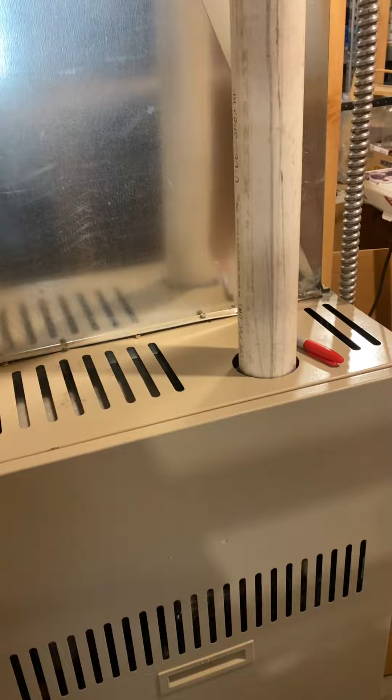Okay, so what we're doing is in the cabin basement, they have this furnace. So we're going to replace the furnace with a new furnace. Our new furnace is going to be 110,000 BTU.

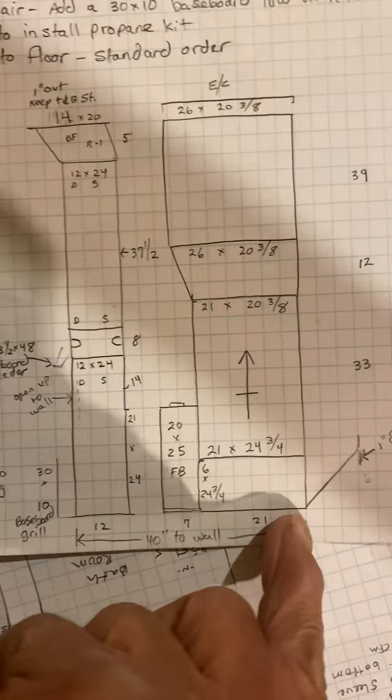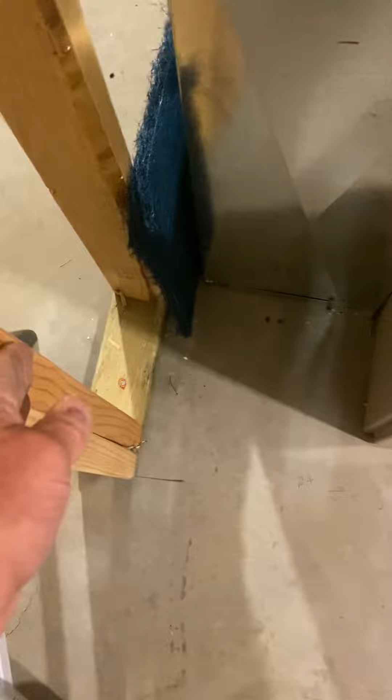I wrote on here, the right side of the furnace is going to be 40 inches from this 2x4 wall, all the way over to here. So you're going to have a 12-inch return air duct, 7-inch filter in your furnace.

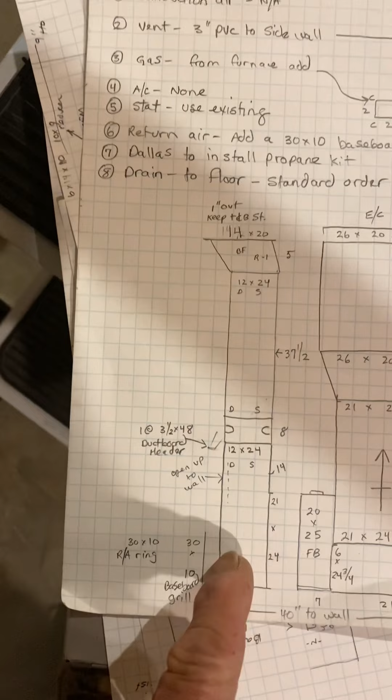Okay, so on the return, it's going to be tied against the wall. And duct just as it shows. I have a cut line right there.

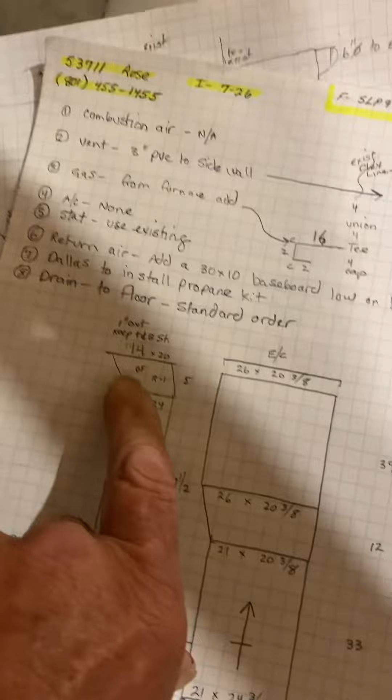So this is going to be a transition, so just do what you need to with this stud here. But it's going to transition from here to 24 by 12. Starting collar there.

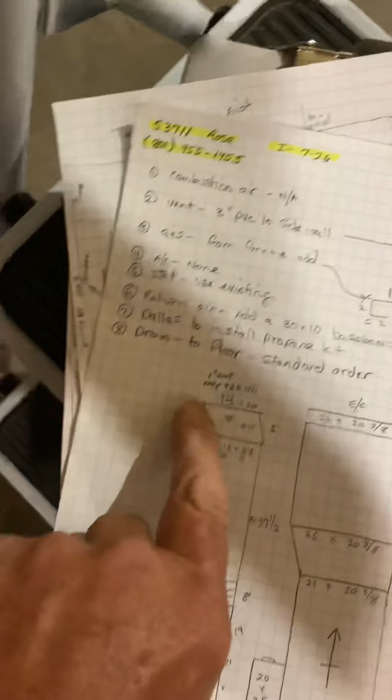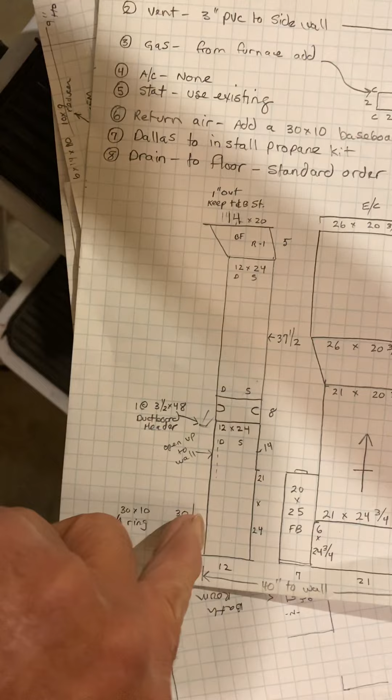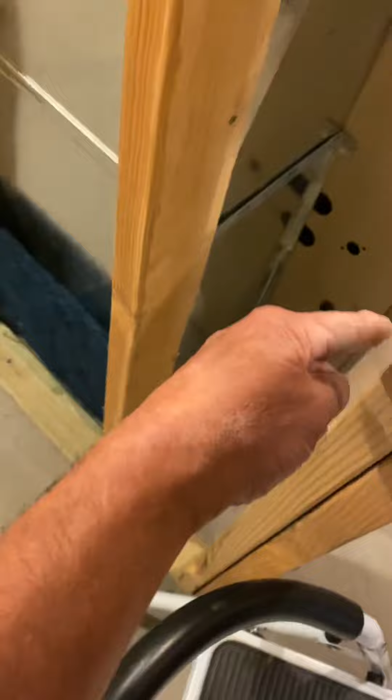Anyway, but we're going to add a 30 by 10 baseboard grill in the return. And so you need to cut out here and put a ductboard header, and I'll give you a piece of panning for the inside of this.

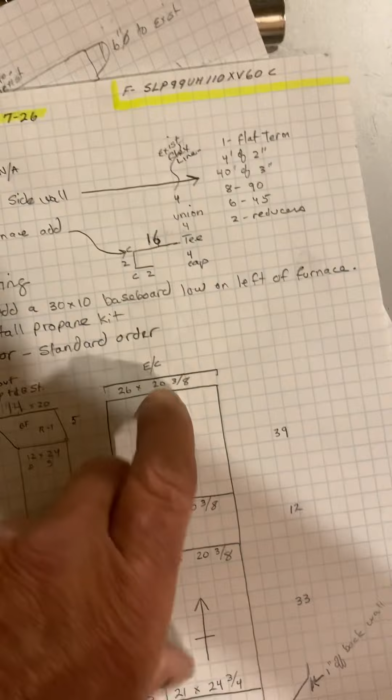Okay, then this duct is going to sit on a base furnace, an increaser, and a piece of duct should be an inch from the ceiling.

Okay, in the side view on the duct plan. So before I go over that, all this duct is undersized. So we're ripping down all the square ductwork in the house. So all these heat runs, round heat runs that are existing, we are going to hook back onto them.

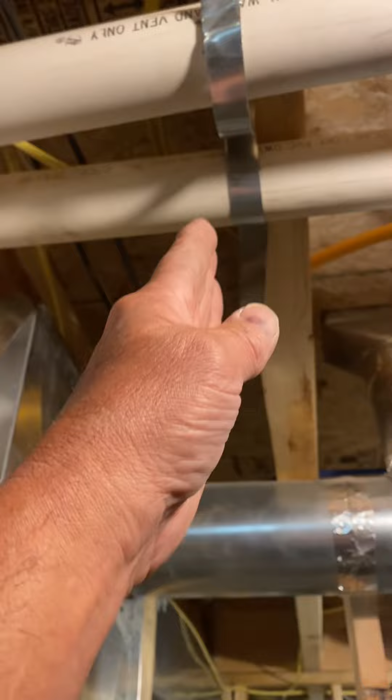Okay, so our side view, got a takeoff off the back. And then this is a top view, just duct as it shows. So duct will be like over here, straight.

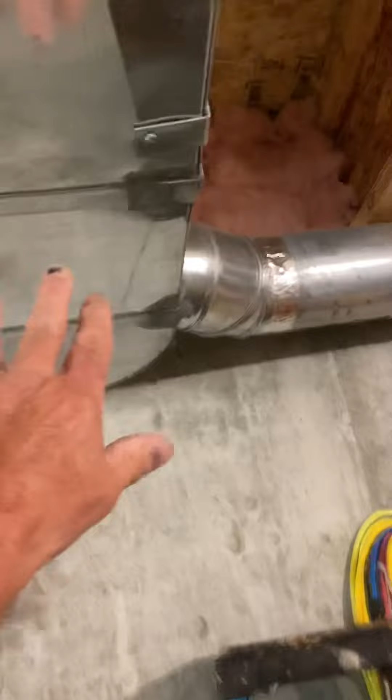As it shows, it's going to come down here, and then I have a T, 24 by 8 to a 20 by 8 and a 6 by 8, or 8 by 8 with a square to round 6-inch round.

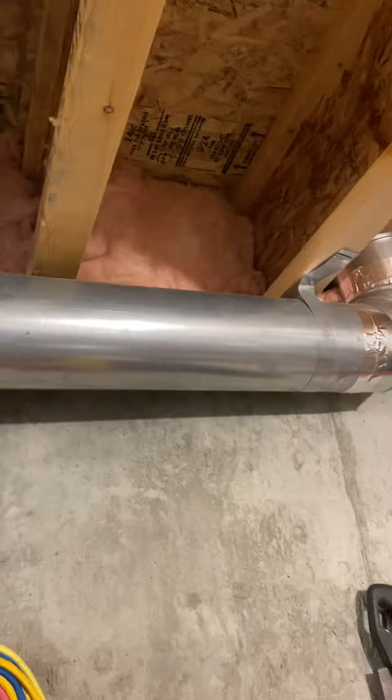And you'll just tie back in that. By the way, this run here and this run up here, you cannot get to. So be careful when you disconnect them that you don't break them or let them fall back, because they're inaccessible.

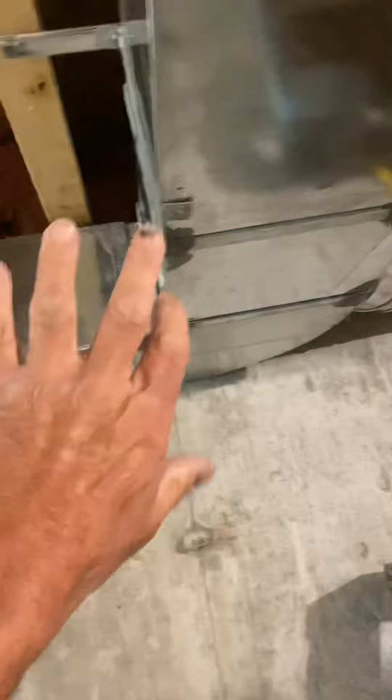Okay, but anyway, so reattach this. This side will just be straight duct. Reattach this one.

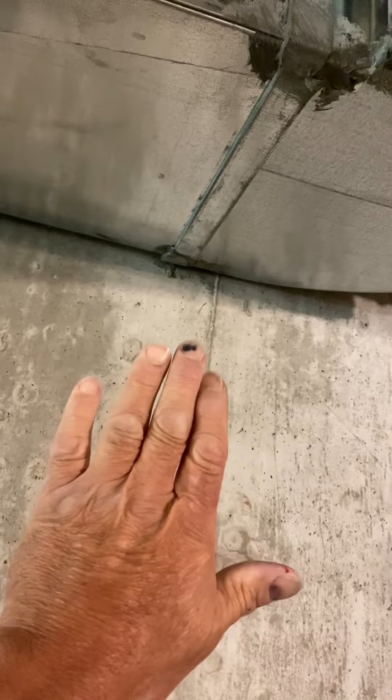Need to reattach this, but our duct, I didn't tell you this, our duct on this wall is going to be about 8 inches out from the wall, so he can get insulation and stuff back in there. If it's 9 inches, that's okay. He just said hold it out from the wall about 8 inches or so.

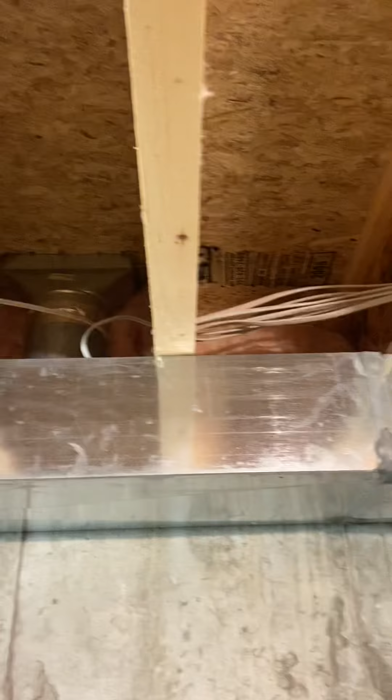Anyway, so on this one, since our duct's going to be out, I gave you an angle boot, 4x10 angle boot, and a 90 and a top takeoff.

So if you can use a top takeoff and then just leave that boot with a 90, but I think that might be too low to do all that. So you might have to do a top takeoff and offset type thing into the boot.

Same thing with this one here. But anyway, duct as it shows, gonna come down here, and then it's gonna have a reducer, and then an end cap.

Reattach this one. I'll go over the basement runs in a minute.

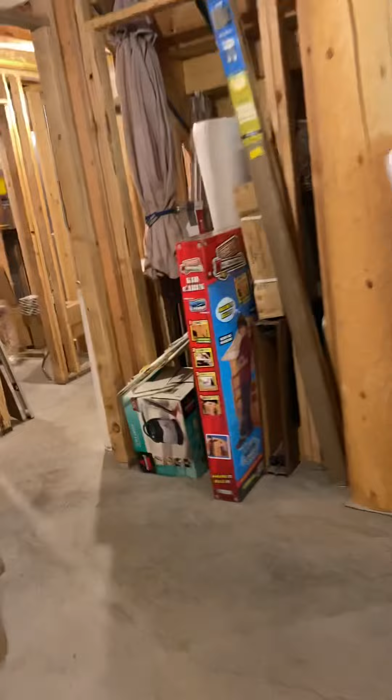Okay, on the north side, on the front side of the furnace, same thing. You're going to have a side takeoff piece of duct to a 90. And then I have a fitting top up 3 inches.

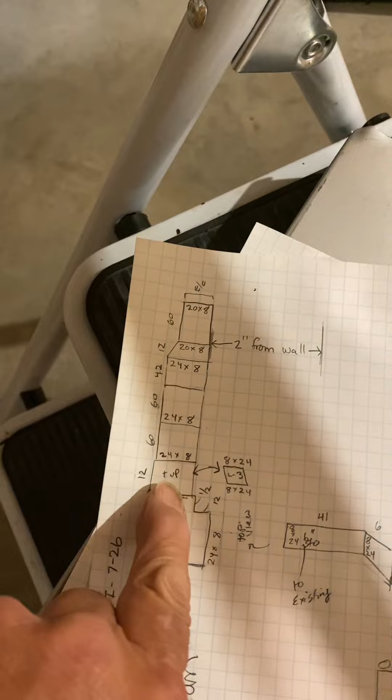And so this here, I wrote 2 inches from wall. So this duct needs to be at least 2 inches from this wall, because he has all these wires, and he's gonna, when we take the duct down, take all these wires and put them on this side in this conduit. And this water line he's gonna have moved as well.

Anyway, so duct just shows all the way to the end.

Okay. Hold on just a second, just had a thought.

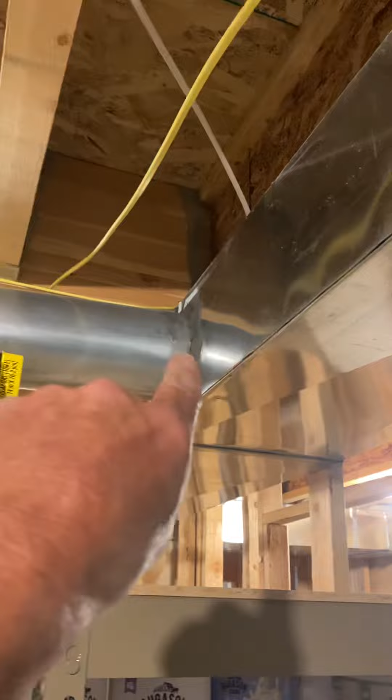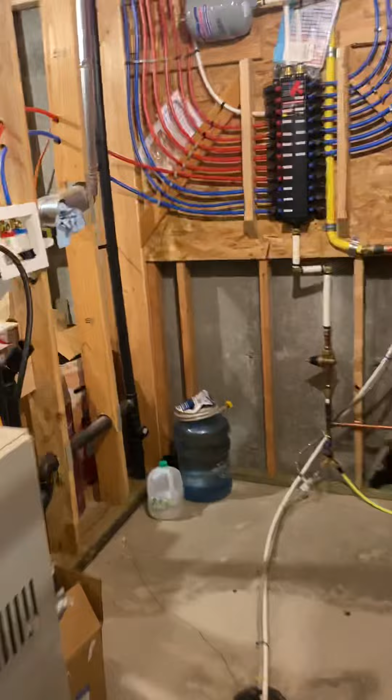You're going to hook up this one, get a side takeoff, 6-inch side takeoff, and re-hook it up as is. The one in the furnace room, the existing, I just gave you a 6-inch side takeoff, re-hook it up as is. Same with this one here.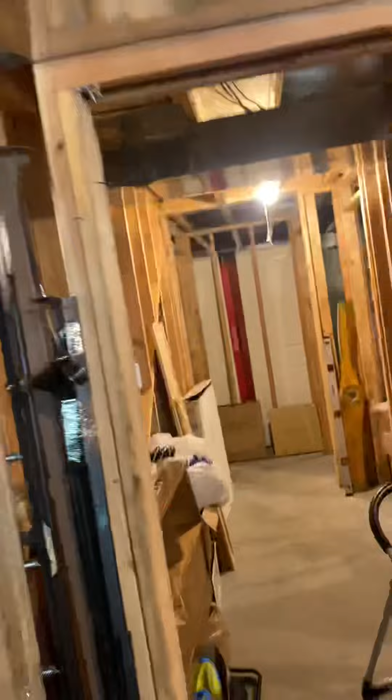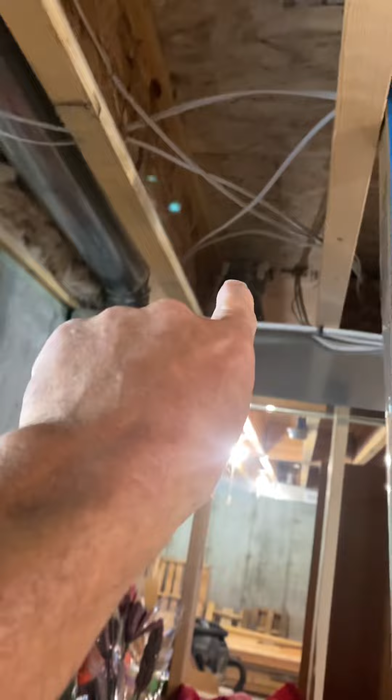So I gave you a 6-inch top takeoff for this one here. I gave you a 6-inch top takeoff and a 90 to rehook up that one that goes up, round pipe. And on the back side, I gave you a 6-inch side takeoff to rehook up what goes back there.

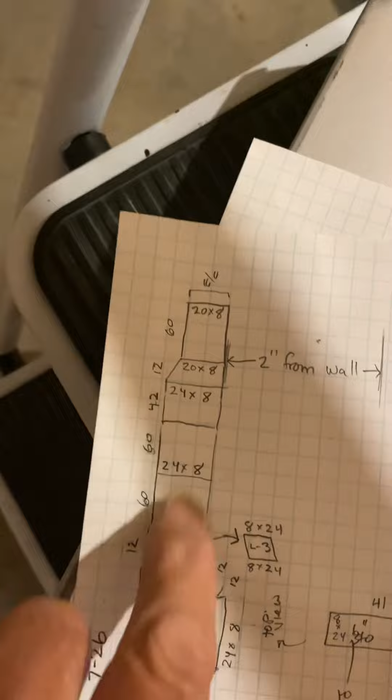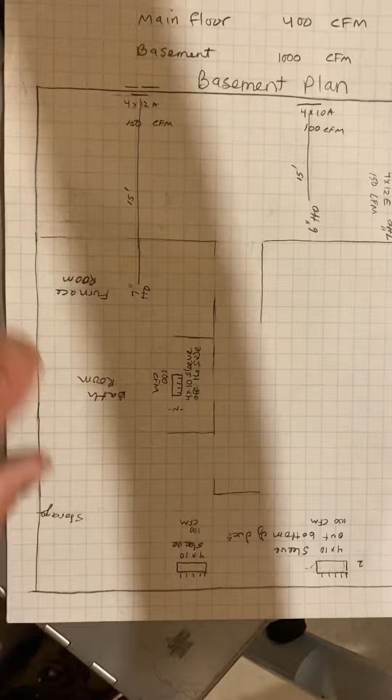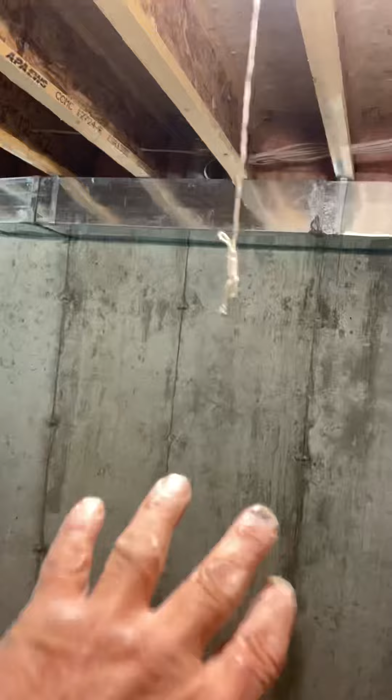In the bathroom, in our new duct, we're just going to put a 4x10 sleeve in the side of the duct. Over in this big room here, we're going to put a 4x10 sleeve in the bottom of the duct here, and one over here.

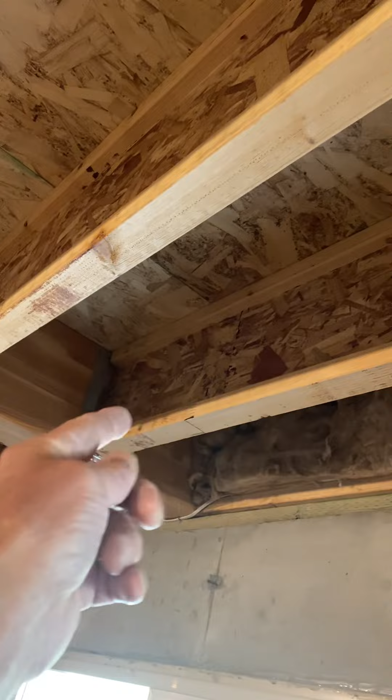And then off the end of the duct, we're going to take a 9-inch top takeoff to a 6x14x10 end boot and a 9x10 increaser. And that'll get this whole side.

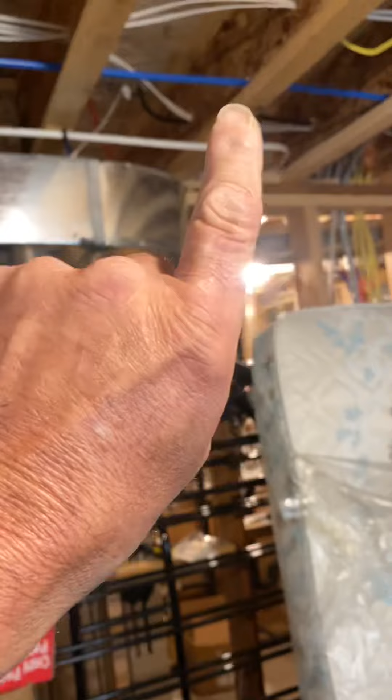On the front side of the furnace in this room, we're going to put a 4x12 by 7-inch round top takeoff on top of the duct. You're going to have to cut it back in this first piece of duct so you're not coming out the top of the 90. So cut it back here and run it over. So 4x12 by 7 angle boot.

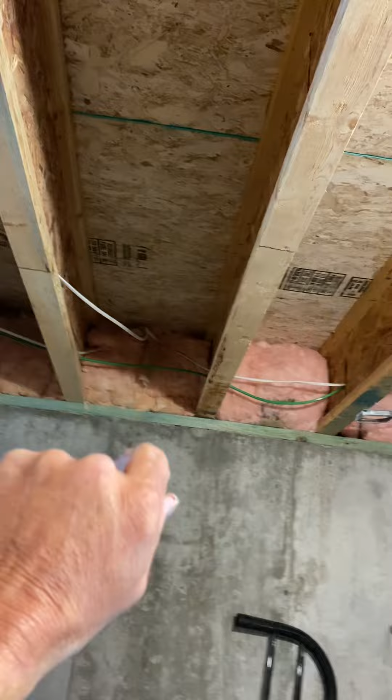And over here you have the metal light, so 2 things over from the metal light, put a 4x10 by 6 angle boot. Then over this window, our duct's going to be wider, so you should be able to fit 2 either in here or here. Either one will work, but this one's going to get a 7-inch as well. 7-inch top takeoff to a 4x12 by 7 end boot.

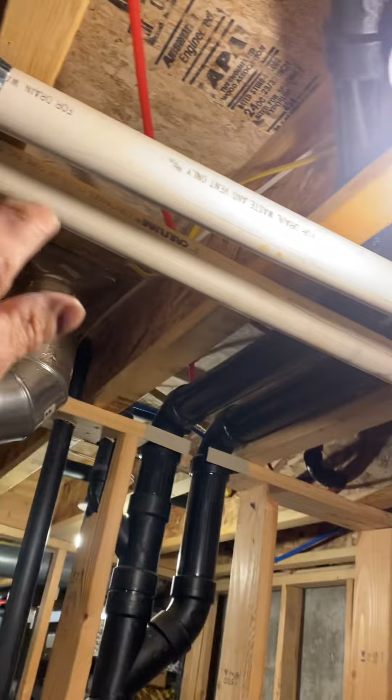Okay, so our combustion air, we don't have combustion air, we don't need it, so not applicable. Our vent, we're upsizing the size of the furnace. These are 2-inch, we need 3-inch flues for this furnace we're putting in.

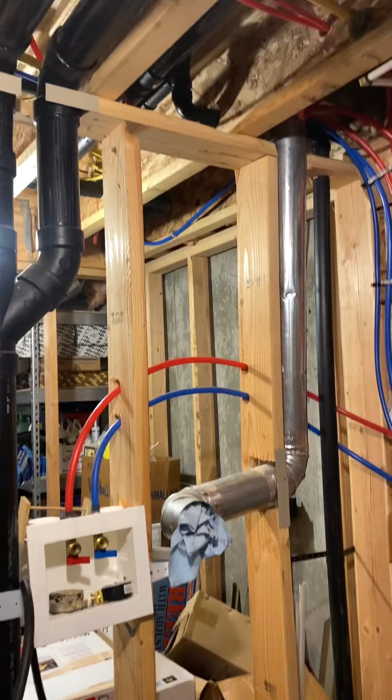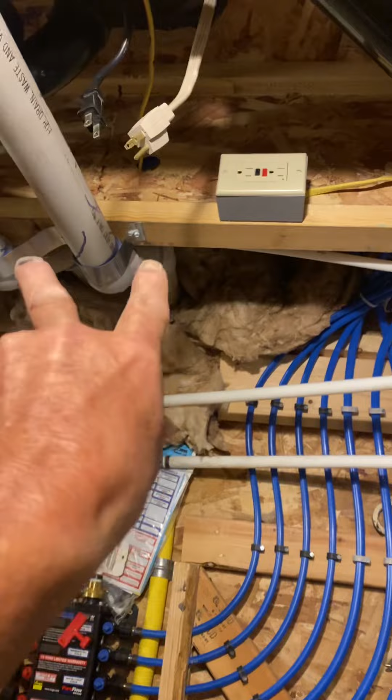So we're gonna put on a 3-inch flat termination. I think if you drill your holes right, you should be able to fit that in place of what's there. And then I just gave you enough parts to do your 3-inch.

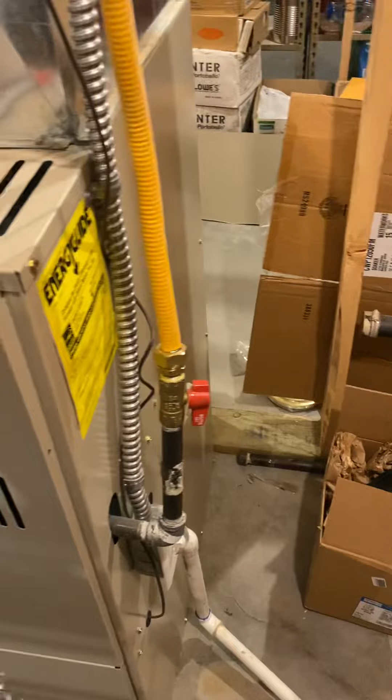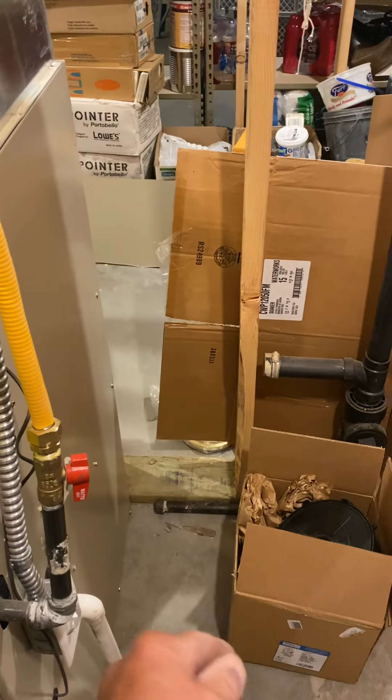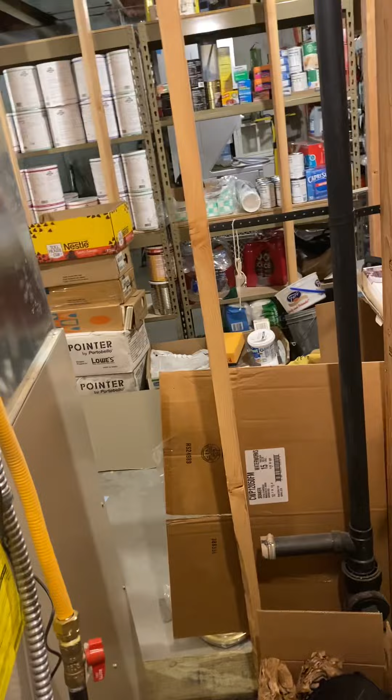Okay, on the gas, I gave you just a 16-inch nipple out of the furnace with a T and a drip leg. And then I gave you a 4 and a metal union and a 4, and just rehook up this pipe to, I guess I don't need that top 4, you can reuse this. But yeah, just rehook up this gas. And Dallas, or a service tech, is scheduled to come put in a propane kit on here.

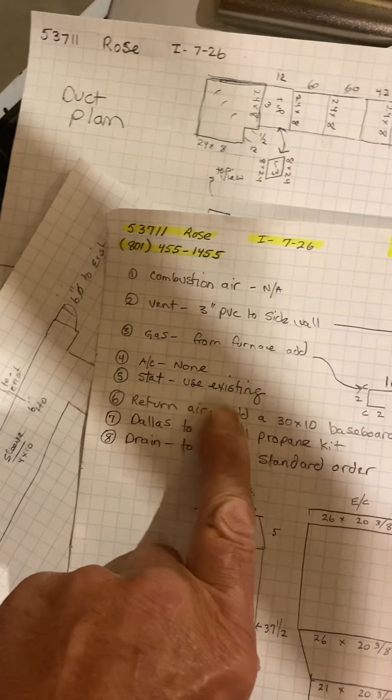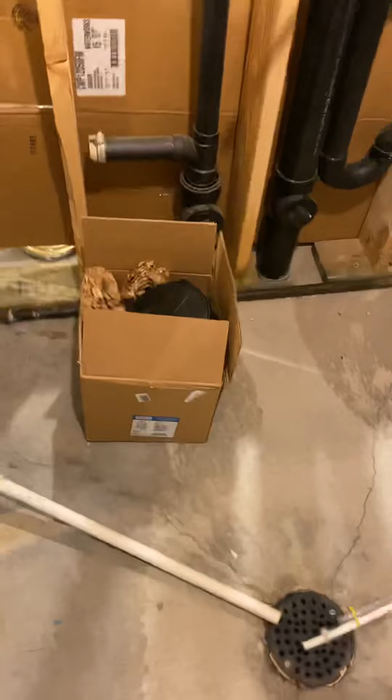Okay, so what else? No AC. Stat, we're going to reuse existing. I told you about the return air. Propane kit. The drain, we'll just go to the floor drain, standard order. And the electrical, we're just going to reuse the electrical as is.

All these vents in the sidewalls, you can take those off. We are not having, do not put them back in the new duct, of course. That's about it.